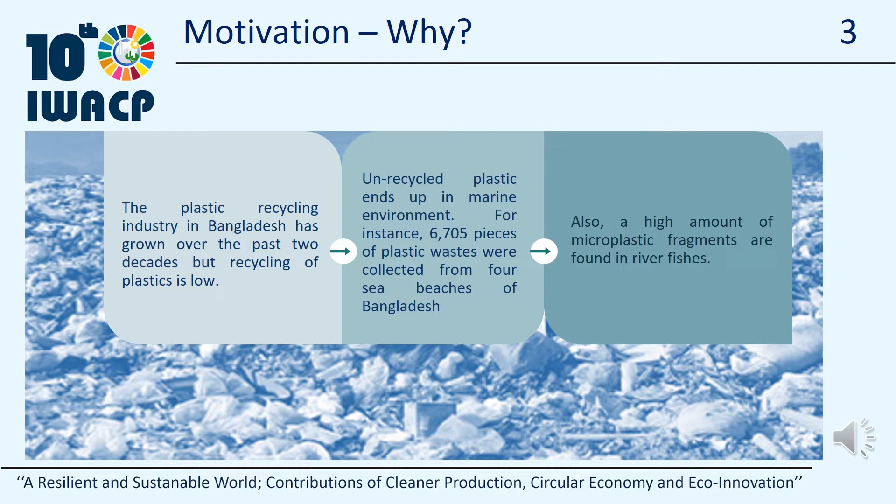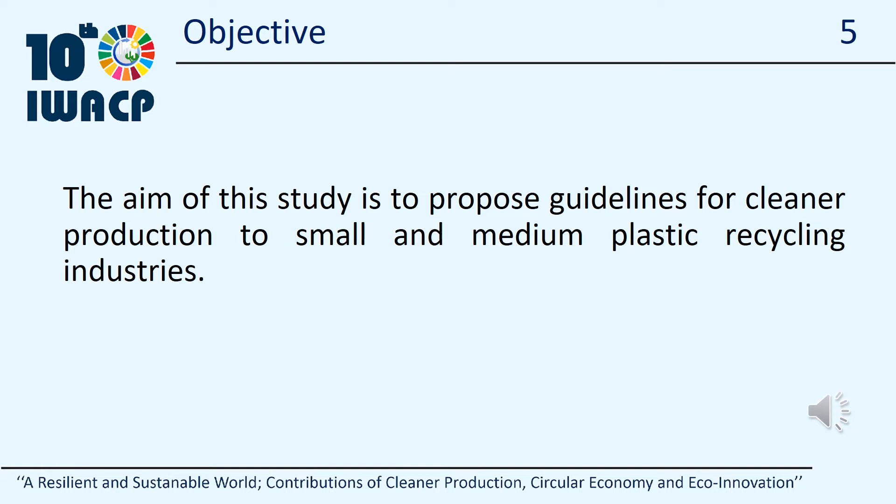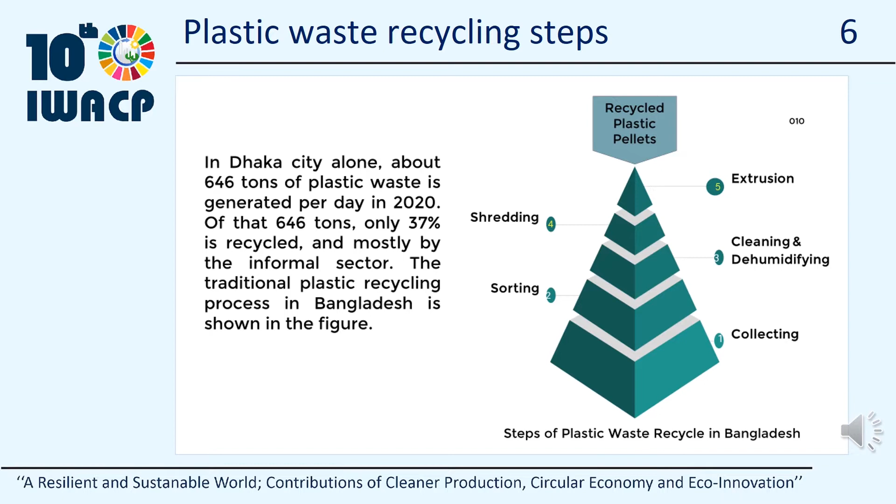The recycling process is shown here, which has a lot of room for improvement because in Bangladesh the practice is not standardized. Most of the works are done manually, which is not acceptable, and most importantly is harmful for both environment and human health. We've got to know that the role of plastic in the circular economy is a topic of high interest, and a major percentage of the used plastic is mismanaged in Bangladesh, posing a great threat to the environment and human health.

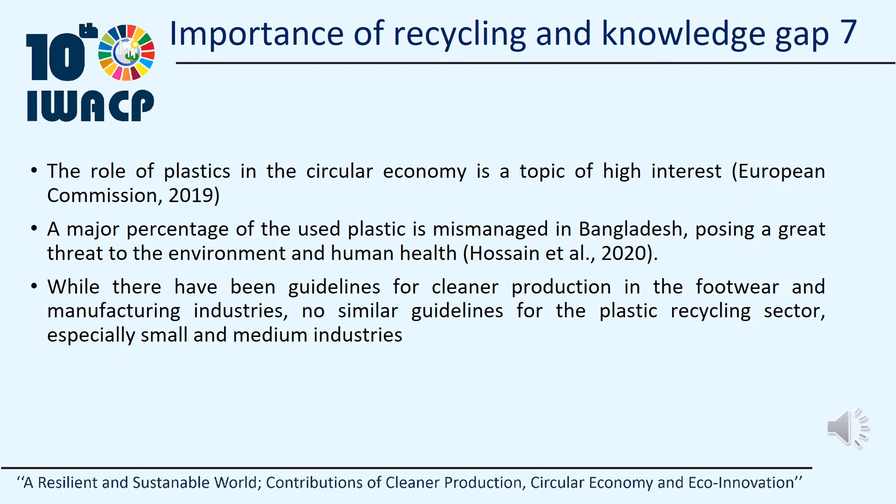But it is a matter of great regret that where there have been guidelines for cleaner production in the footwear and manufacturing industries, no similar guidelines for the plastic recycling sector, especially small and medium industries, have been proposed till now. This research seeks to detect harmful plastic recycling practices. We have gone through 50 plus papers to conclude that cleaner production guidelines will help to formalize the recycling sector by presenting a standardized way to perform it. Implementation of cleaner production guidelines will increase profitability and productivity, lower production costs, and ensure more efficient use of energy. So now we will talk about our proposed guideline based on cleaner production for plastic recycling industries.

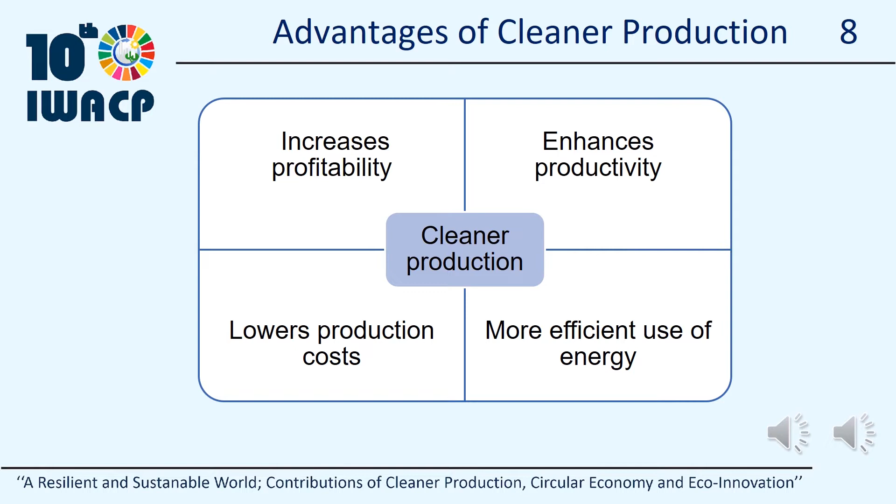Thank you, Tasfia. This is Shunchita. The aspiration of proposed guideline is to ensure increased production while reducing waste generation and harmful environmental impact. The guidelines are segmented into 6 categories, namely principle of automation, energy consumption and resource management, increase in environmental efficiency, environmental protection and waste management, enhancing environmental management, and occupational safety and health. Now I will mention some vital points from the proposed guidelines.

Starting with collection, innovative waste collection ideas are required to minimize unattended plastic waste. Consumers should be encouraged to learn more about reusability, recyclability, and recoverability of products. Then, sorting hazardous waste out, the rest of the plastic waste should be segregated according to their chemical components to ensure efficient recycling. The manual cleaning and drying process is harmful to both the environment and the workers related. Therefore, industrialization of this process is strongly recommended. Installation of advanced and automated machines for shredding and extrusion would result in reduced waste generation.

Every employee should have adequate knowledge and proper training. They should be encouraged to use industrial personal protection equipment. To reduce electricity uses, destratification fans and high efficiency lamps may be installed. We further recommend utilizing solar energy to meet the electricity demand. Generated waste must be treated before discharging into the environment. Grey water reuse with proper treatment is highly encouraged. When the water is not recycled, it shouldn't be thrown out directly into the earth.

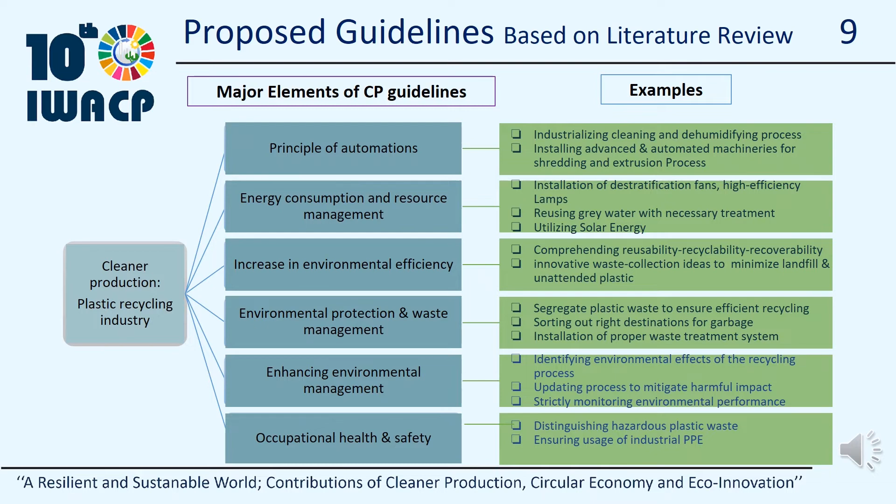The environmental impact of the full process must be addressed and the process has to be updated accordingly to mitigate the harmful impact. Then standard operation procedure must be established and maintained. The environmental performance has to be under continuous and strict scanning. This was a glimpse of the proposed guidelines. Now this is a flowchart showing our methodology. We used our research and industry experience to conduct a rigorous case study and develop effective guidelines. We then conducted a focus group survey with open-ended questions. Afterward, we evaluated our guidelines' viability in the context of Bangladesh plastic recycling business.

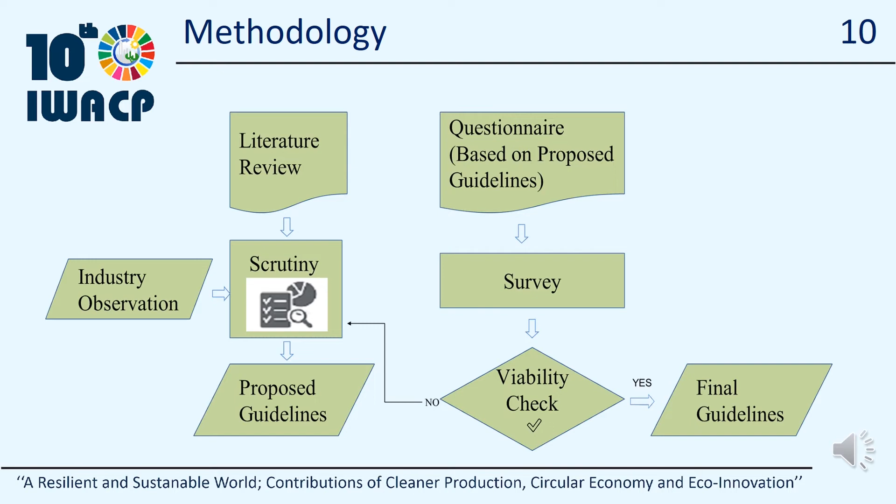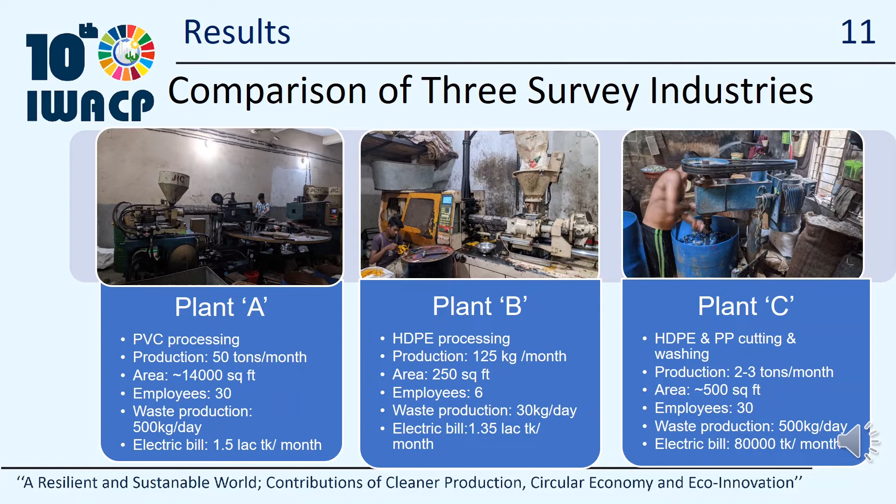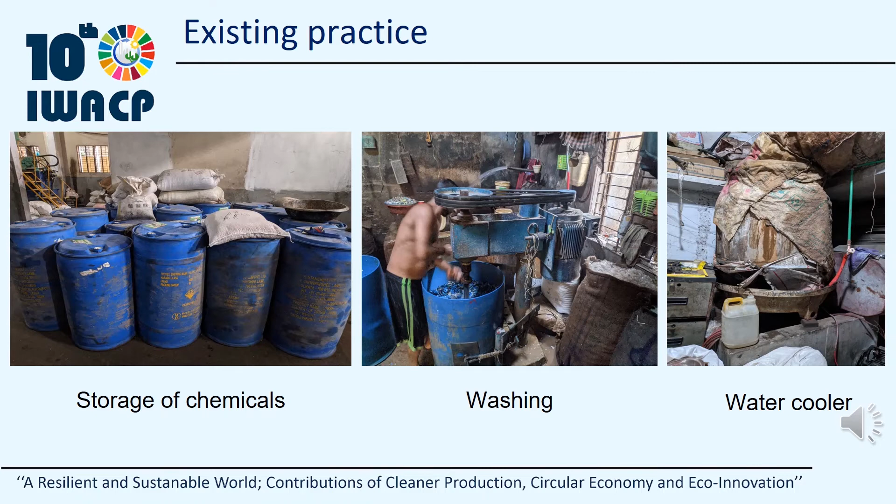Okay, now come to the results and findings. For this work, we have visited 3 recycling industries of different types. Here, we have compared 3 industries according to the process, production, work area, employees number, waste generation, and monthly electric bill. And here are some pictures that were taken during the operating hours of industries as they practice. In this slide, we have mentioned to what extent cleaner production guidelines are applied in the surveyed industries currently.

In the industries, most of the processing steps are done manually and old machineries are used for shredding and heating. For energy source, they solely rely on electricity. They had only installed electric fans and energy efficient lights in their industries. To increase environmental efficiency, plastic wastes are reused and unwanted wastes are resold. For waste management, wastes are sorted generically, but wastewater is discharged after recycling a few times without any further treatment. To enhance environmental management, environmental impacts are not identified and assessed, and vocational training has never emerged. For safety, there is no fire alarm or smoke detector, and workers don't use any sort of protective equipment.

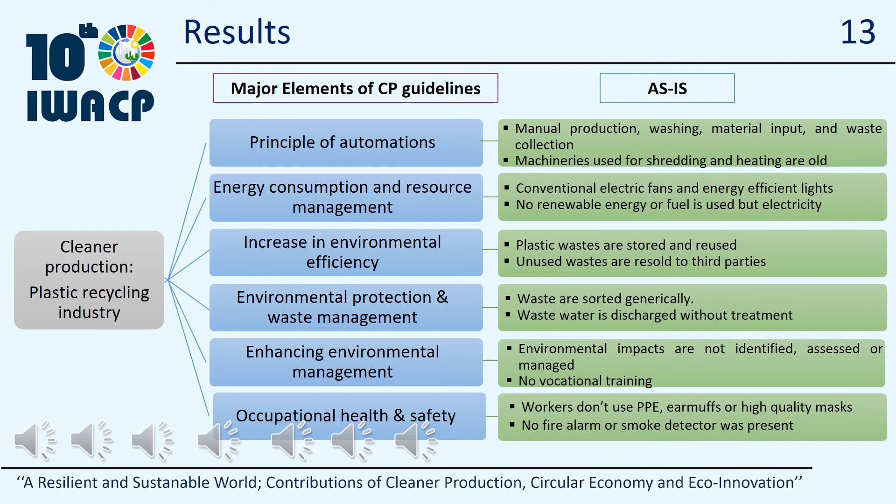Talking about major challenges and opportunities, firstly, absence of proper rules and regulations. Then, inaccessibility of the resources, mainly financial, managerial, and technical. Thirdly, being indifferent to environmental damages and lack of awareness. And finally, not taking health and safety risks seriously.

Coming to the conclusion, a critical question would arise whether current practice of plastic recycling is doing more bad than good, as it would be very hard to implement automation guidelines by small and medium enterprises. Also, it's difficult to understand inefficiencies as use of energy is not measured. So, proper regulations and policies should be mandatory for SMEs to minimize environmental risks and ensure safety.